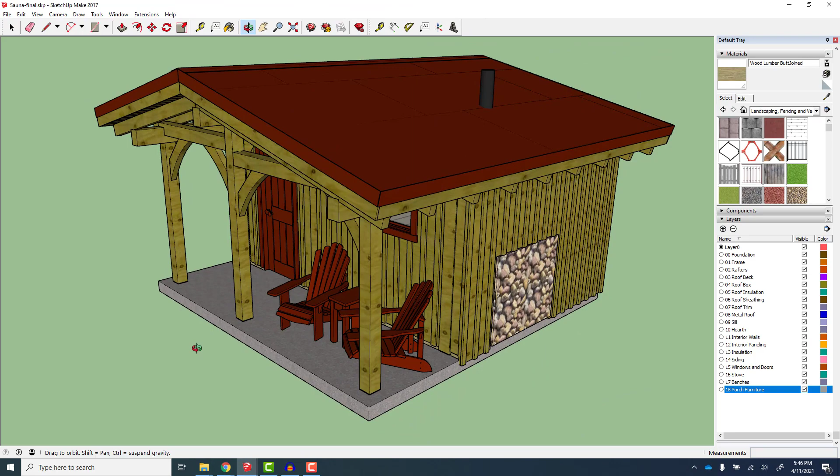I started by designing the sauna using SketchUp. However, during the construction process, I was continually tweaking my design and sorting out the details as we built. Now that the project is done, I thought I'd walk you through the final design, kind of following the construction process. So after pouring the foundation and the slab, we first raised the frame and then installed the rafters.

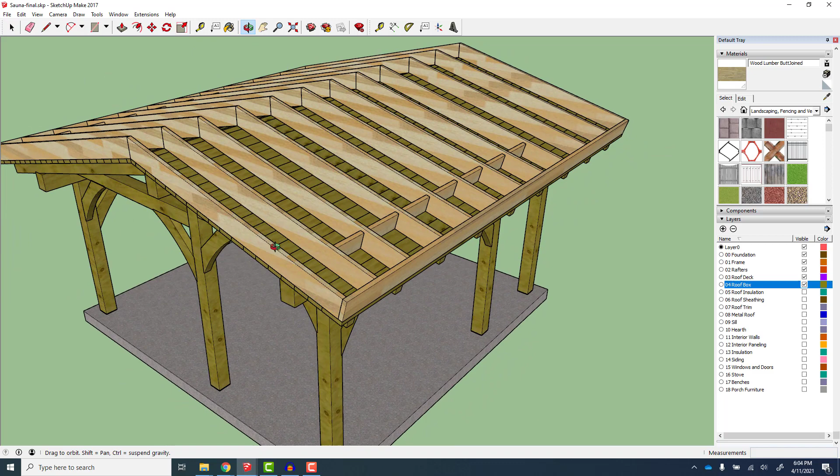With the frame raised, we then put down some roof decking, which was 1.5 inch thick poplar, built a roof box out of 2x10 construction lumber, and insulated the roof with 3 layers of 2-inch thick rigid foam insulation. That left a 1.25 inch air gap above the insulation, so ventilation could come through the holes drilled in the eaves, up and escape through the ridge vent.

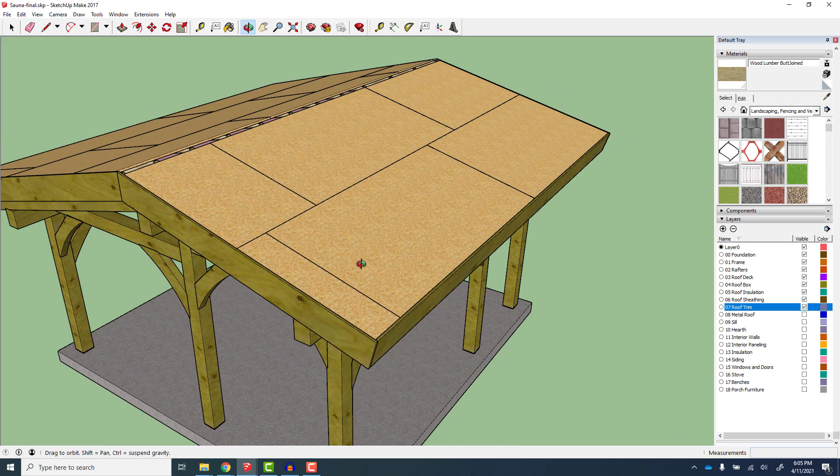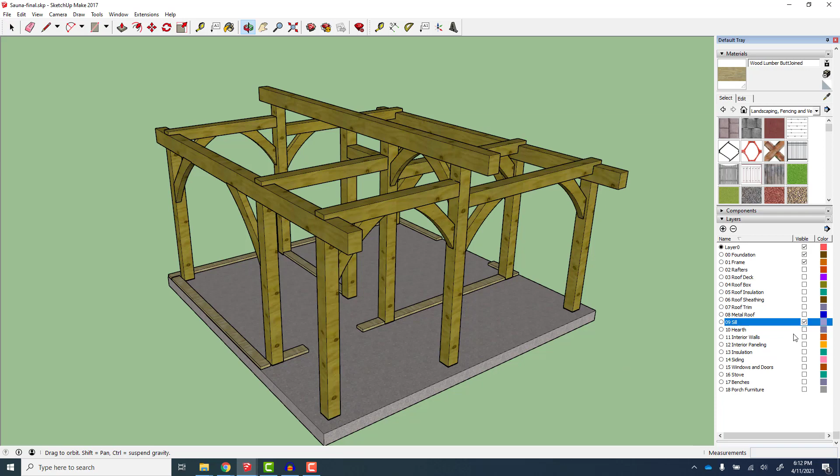When we installed the roof sheathing, we left a gap for a ventilated ridge cap, installed some poplar trim around the edges of the roof, and then installed a metal roof. Now I'll temporarily hide all the roofing details so we can see better what happens for the rest of the construction process. Next, we installed sills, which I bolted to the foundation. Built up a fieldstone hearth.

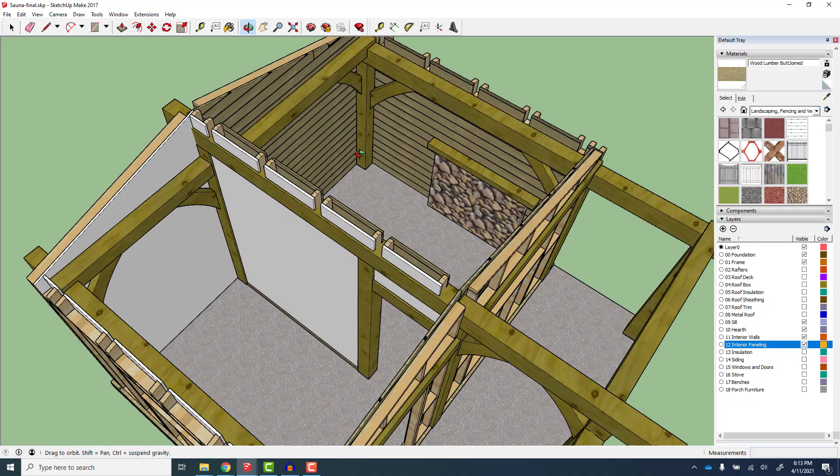Then I started building the interior wall panels. And actually, as I built those, I put the wall paneling on the walls and just stood the walls up and bolted them to the frame as I did that. In the change room, the walls are lined with a mold-resistant drywall. And in the sauna hot room, we used tongue and groove cedar paneling. And I also carried that across into the front wall of the change room.

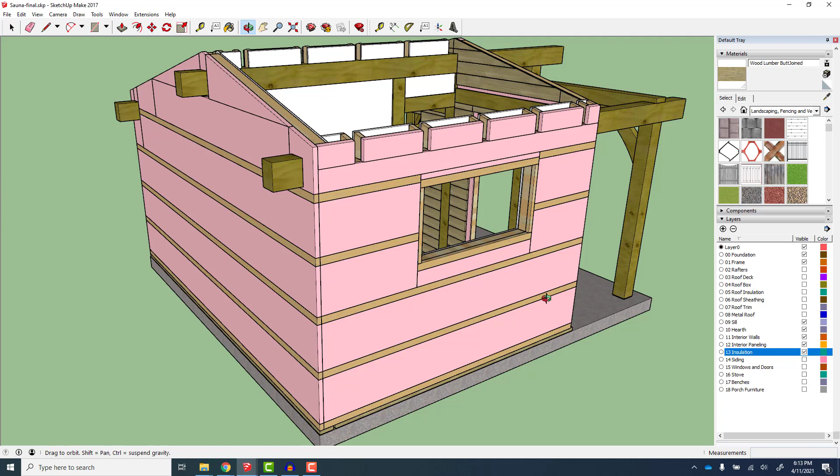With the walls built, I then installed some fiberglass batts in the 2x4 walls. And then outside of that, a layer of 1.5 inch thick rigid foam insulation went on the outside, along with some 1x2 strapping that was used to screw the board and batten siding on the exterior of the sauna.

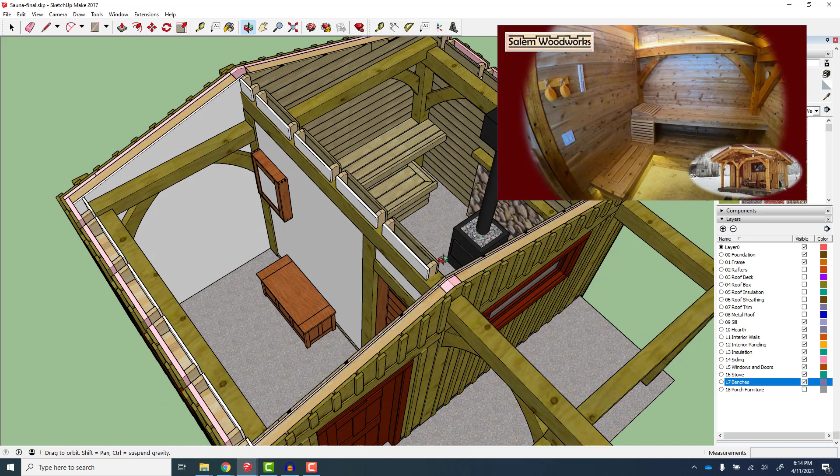Then with that done, we installed some trim and some windows and doors, and then started to get to some of the interior detail. We installed the wood stove, built out some benches and some furnishings for the change room, and then finally some furniture for the front porch. So that's it. That's the full sauna build.

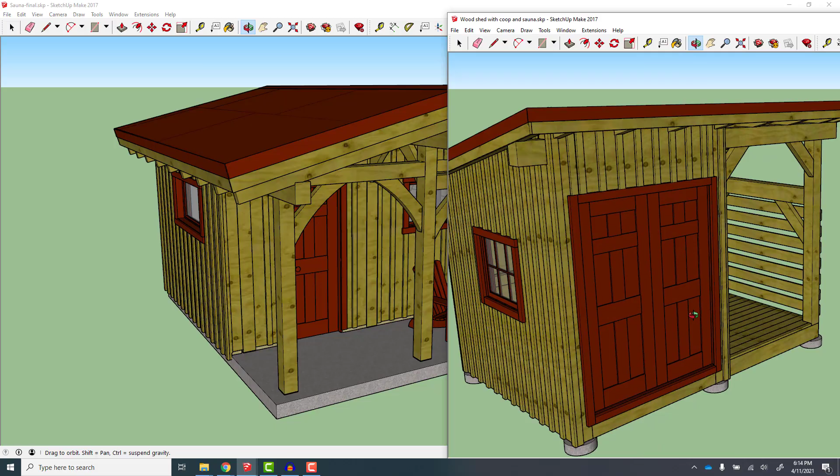The next project along the way is actually we're going to build a timber frame woodshed, done very much in a similar style that we think will complement the sauna nicely. Garden shed on one side, woodshed on the other.